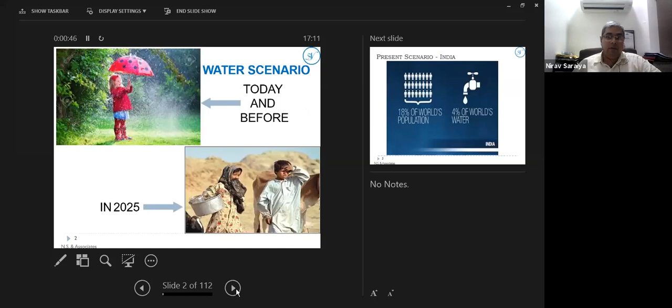Present scenario in India or of the world: only 18% of the world's population is getting 4% of world's water. Nearly half of the world will be short of water by 2025.

54% of India is currently facing high to extremely high water stress. You can see in different parts of India how much water stress is there. Every part of India is facing water problems at some time or another.

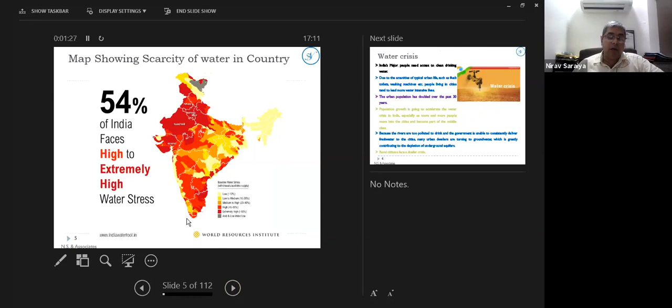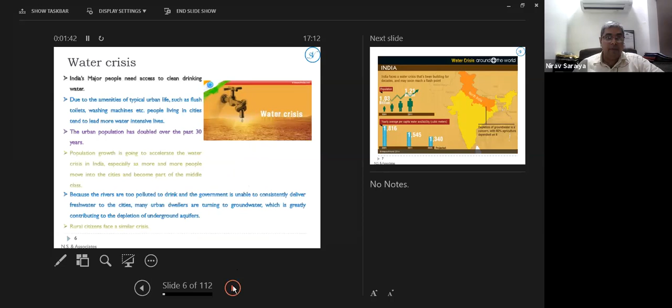Water crisis has become an important part of our life. But how can we reduce it? How can we improve it? We can do it by doing rainwater harvesting.

Earlier, the availability of water in the year 2000 was almost 1800 cubic meters per person per year. Now it has gone down to 1300 cubic meters per year. So water availability has gone down year by year, and as the population increases and due to climatic change, the availability of water will keep on reducing.

Rainwater harvesting is the only solution for reducing the water crisis and eliminating water deficiency. Rainwater is the purest form of water. You can even drink that water if it is properly caught, properly stored, and reutilized after proper treatment. It's the only ultimate source of fresh water.

In this world, 97% of water is in the sea. It's saline water that cannot be utilized. Out of the remaining 3% of good quality water, 2% is groundwater and only 1% is in lakes and rivers. So to meet our water demands in a tremendous way, rainwater harvesting helps us overcome water scarcity, and rain becomes the only and ultimate source that feeds all our sources.

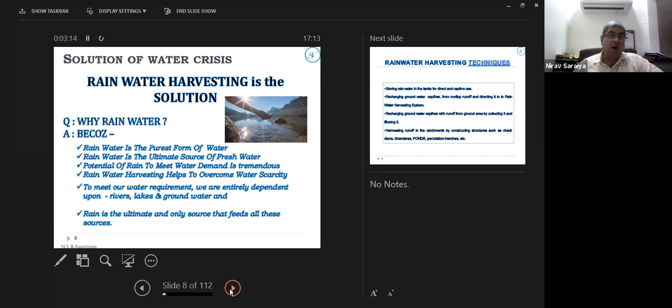What are the different techniques of rainwater harvesting? There are two basic techniques. One is rooftop rainwater harvesting, where that water can be collected into tanks and reutilized during monsoon season or during non-monsoon season for drinking purposes only.

It is not practical to collect the water and store it for the whole year for all purposes. For that, the tank capacity has to be very huge, which becomes non-economical, and hence storage of water for a long time in tanks is ineffective.

The second, very good and best methodology is recharging groundwater through borewells or wells. The water in the ground gets accumulated in aquifers, a natural storage area. The technical word is aquifers, so we need to store that water in these aquifers.

The only issue is that there are no boundaries to these aquifers. The aquifers are spread across a few square kilometers, and for an individual building, there cannot be any boundaries below the earth's strata. Hence, whatever recharging happens becomes a community project and is helpful to everybody.

It's not that only the particular plot holder or society which does the recharging will benefit from it. Surrounding areas, other borewells or wells nearby, will also be beneficial. So it becomes a community project.

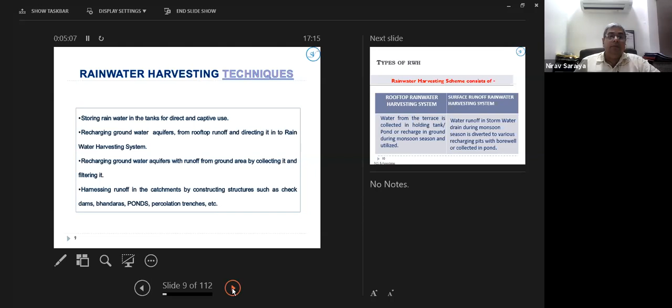As I told you, there is rooftop rainwater harvesting and surface rainwater harvesting. The terrace water, whatever falls on the building, can be collected in a holding tank or recharged into the ground through a borewell or well. Or if you have additional plot area capacity, you can collect it in a pond and reutilize that water later.

Surface water, compound area water, can be recharged into the ground, or if storage space is there, you can collect it into a pond.

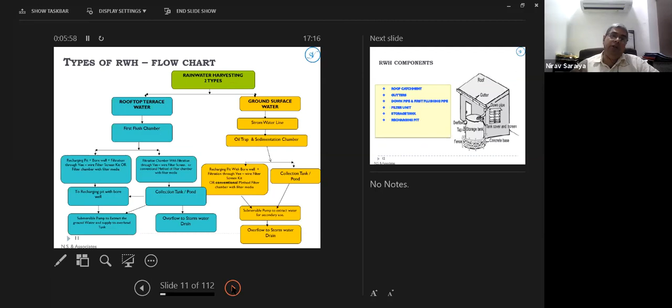Now, what are the components of rooftop rainwater harvesting? In a normal building or a bungalow, there are rainwater downtake pipes, also called rainwater gutters. You require a pipeline to take underground connectivity of all rainwater downtakes to the nearest tank or a borewell.

Then a storage unit, either a recharging pit or a storage unit. But before collection or recharging of water, you need to filter it. Otherwise it will choke your recharging pit, or the storage tank will get silt, and it will choke the pumps.

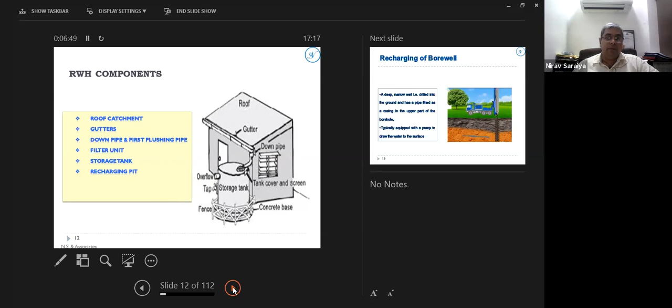Now, how does recharging happen? A borewell is a small hole in the earth strata. Many people still don't know what a borewell is. It's drilled up to 200, 300, 400 feet, reaching the deeper location in the earth strata where water is available. Through that location we install a pump and extract water. Through that same borewell we can inject water, and that process is called percolation or recharging.

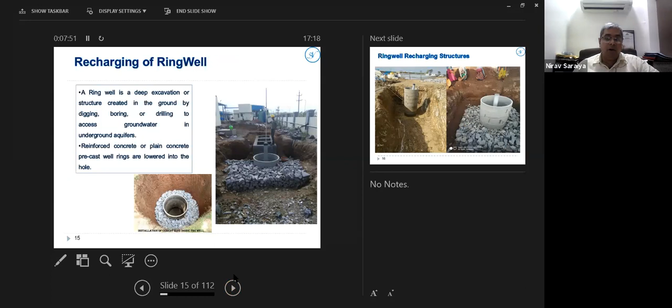This is how the borewell gets drilled in different aquifers or geological formations. This is a typical recharging pit with a ring well and a borewell, and these three units you see are filtration chambers. This is a typical ring well for recharging purposes. These are different photographs of recharging pits and ring wells.

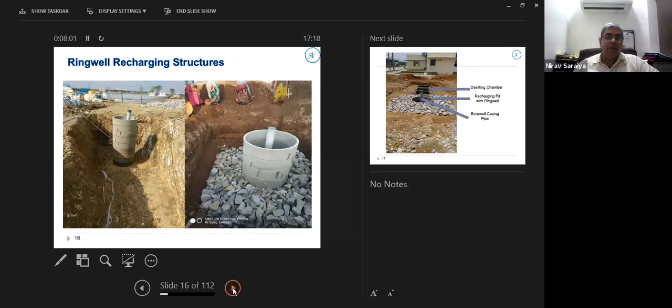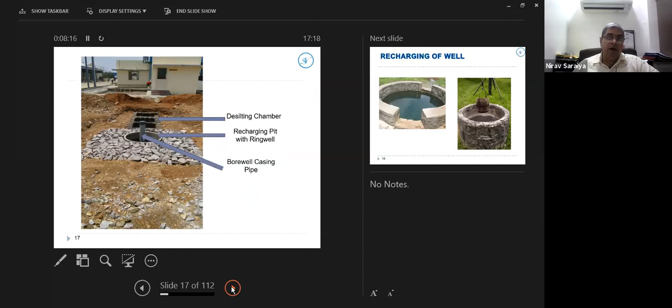This is how the recharging pit looks once you come to ground level. On top of it you can put PCC or do concretization, allowing parking of vehicles, movement of people, and even fire engines or firefighting vehicles to pass over it. This is recharging of a well.

Now, what are the basic requirements for recharging? What data do you require? You require the layout plan, and a groundwater prospect map, which is usually available with a vendor. In Maharashtra it is not provided by the government, so it's not available, but in many parts of India it is. You also need meteorological data—annual rainfall data, how much rainfall falls in a particular area like Bombay, total number of rainy days, and how much of that water you can recharge into the ground. That can be determined once you get this data, along with the recharging capacity of the borewell.

If there is a larger plot, you conduct a hydrogeological survey and study the aquifers. But if the whole plot is concretized or paved with blocks, you can still evaluate the availability of water and the possibility of recharging through a conventional methodology.

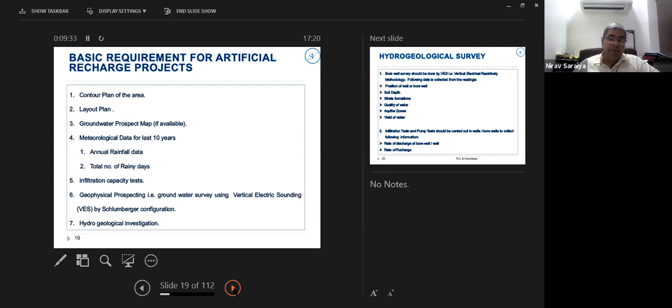This is a technical matter. I will be skipping this method.

Now, these are the typical designs followed in India, and this has failed drastically in urban areas. This is a typical ring well with a borewell in between, and these are the different layers of filter media. I am stressing on this because in most societies in Mumbai, Pune, and different parts of Maharashtra, these typical designs are followed. After spending money, society members or bungalow owners feel they have done rainwater harvesting, but this is most ineffective, and the money gets wasted implementing such systems.

This is a borewell in between, with sand, gravel, and stones. This gets choked very fast. Once it chokes, the water level rises in the ring well. The slots or holes in the casing pipe are above the filtration media level, and through these perforations, unfiltered water goes into the borewell, causing it to get contaminated and choked—it would not absorb water or even give out water.

The water will become stagnant in this recharging pit and start stinking. People feel they have spent money and that rainwater harvesting and recharging is happening, but in this scenario it is practically not happening, and all the money has gone down the drain.

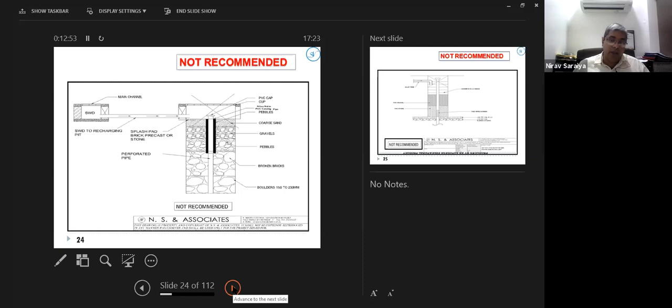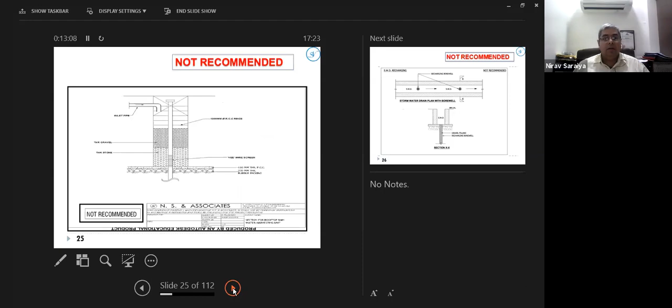This is another not recommended model. Now this is another typical thing I am seeing, another typical thing I am seeing.

Just hold on, just hold on. Hello.

Every type of system you implement, maintenance is the important part. It's an important factor. If you don't keep cleaning the filter media - sand, gravel, stones - every 7 days during the monsoon, the system is going to fail. There are new types of filters available in this industry where minimum or zero maintenance is required. But what we have observed in societies is that costing and the lowest price becomes the only importance. In this scenario, the main purpose of technical competency is lost.

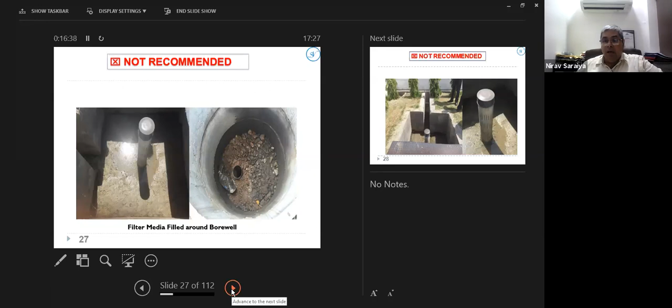These are typical photographs of societies where rainwater harvesting structures were made without any technical guidance, and the systems are choked. Due to water stagnation, lots of insects keep coming, and slots are cut here right up to the top, so unfiltered water goes into the ground and the borewell gets choked. Here inside the ring well, the borewell is just cut above the filter media, and you can see what type of particles are inside - everything has gone into the borewell. This really disturbs the aquifers and the groundwater table.

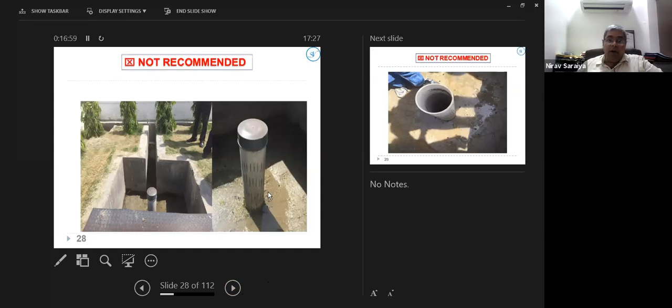This is the direct connectivity from the storm water drain into the recharging pit, and in this photograph you can see the slots above the filtration media - as the water table increases, unfiltered water goes inside. In the next photograph you can see all the dust particles have gone inside.

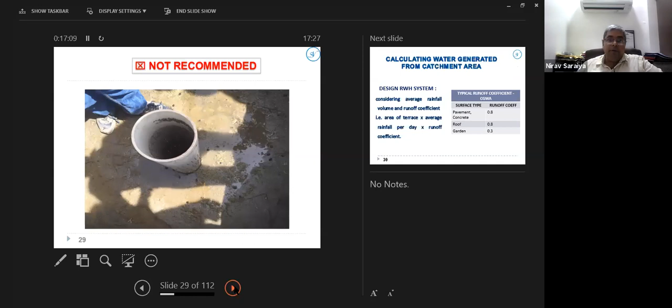These are the various calculations for rainwater harvesting. I would not go into that much technicality right now. I would be more focused on talking about case studies and how rainwater harvesting in societies should be done.

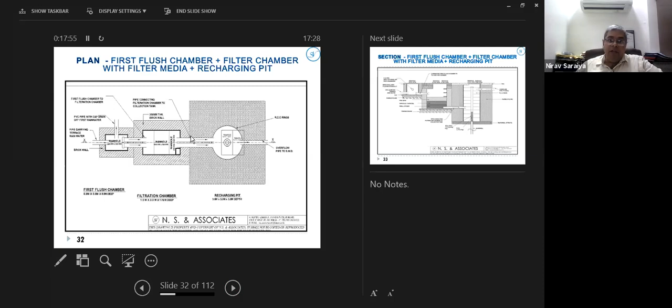This is the typical correct design of rainwater harvesting. First is the first flush chamber - whatever first rainfall comes, a few showers of water should be diverted into the storm water drain because it contains lots of silt, contaminants and pollutants, so that water should not enter the recharging pit. Then you have the filtration chamber with filter media. Here I have seen the filtration chamber placed outside the recharging pit, which reduces contaminants getting accumulated around the borewell and thus does not disturb the subsoil or water level.

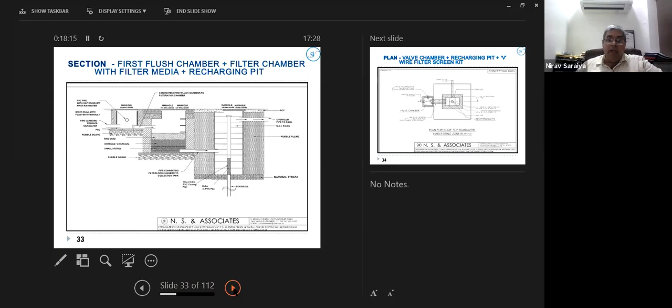Now, what's the difference between the conventional rainwater harvesting structure and our structure? In the conventional design I showed you earlier, which is not recommended, the recharging ring well size is only 1.2 meter diameter. The rainfall coming in is say 10,000 liters of water per day, but borewell recharging capacity is only 500 liters per hour, so you need to store 10,000 liters of water around the borewell in the recharging pit. The ring well is only 3 meters deep and it can collect 3,000 liters of water.

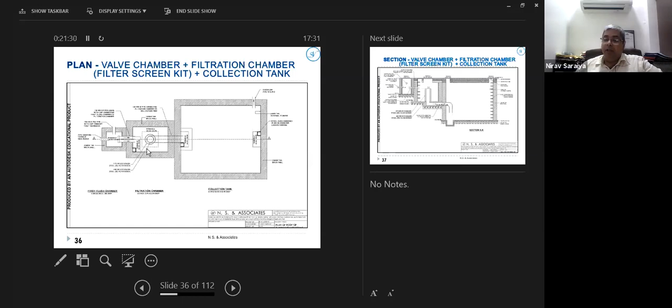Now this is a structure: valve chamber, first flush chamber, filtration chamber with filter screen. These filter screens are called V-wire filter screens. They are non-choking, non-clogging filters, and require only once a year cleaning. That's all, you need not monitor the system. The water gets filtered and keeps on percolating or collecting into the water tank.

Here we have shown this water tank. During the monsoon, you collect this water into the tank and you can utilize it for flushing purposes, and if there is a real water shortage, you treat this water and utilize it for drinking purposes also. In non-monsoon season, you can even utilize this borewell water or the stored water for your gardening purpose.

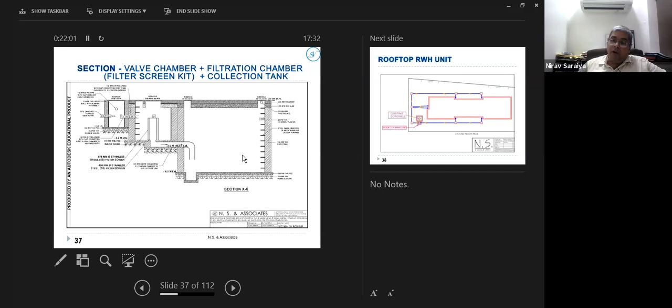They go inside somehow, they do that jugaad and go inside, but they are not able to bring all the filter media to the top, wash it, clean it, and put it back inside. Due to problems going inside and coming out of the recharging structure, the maintenance is not happening properly because a proper ladder is not there for that structure.

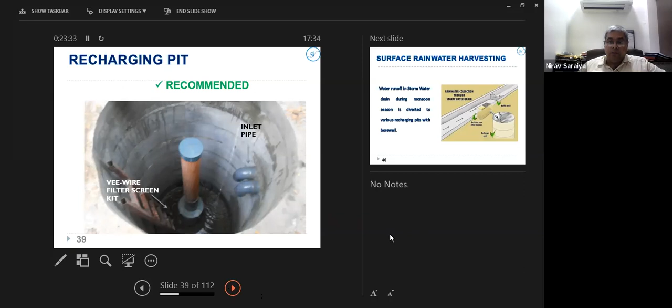This is a surface rainwater harvesting system. This is a storm water drain. From the storm water drain, the water has to pass through the desilting chamber, filtration chamber, and then passed into the recharge structure of the borewell or well.

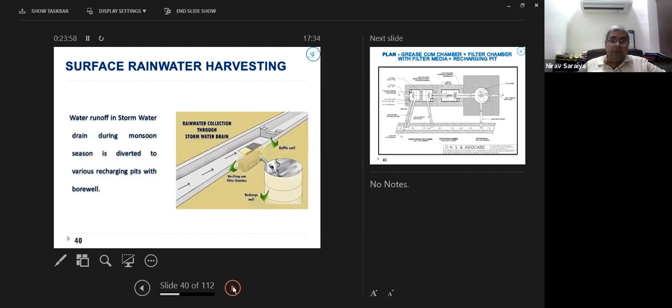This is a typical design of a surface recharge structure: desilting chamber with oil trap, grease trap, sedimentation trap, filtration chamber, and then the recharging pit.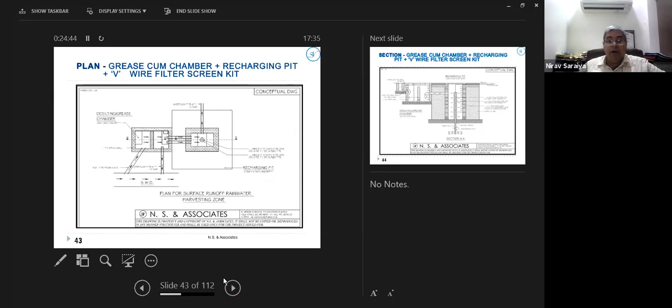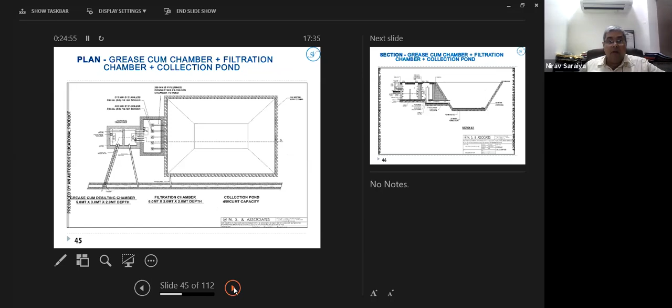This is a typical cross section. Now I will move quickly over to the case studies.

Now this is a speciality of the V-wire filter screen kit. Why am I explaining this? Because it has got a code from BIS, the Bureau of Indian Standard. Whatever other filters are available in this industry, they claim they have a patent or that it's on a technical background, but there is no such technical background.

These are all self-made, self-proclaimed, self-marketed filters. But there is no technology behind such filters. So please be aware that you don't choose the wrong filters.

Second thing, this is made of SS304 and they are non-clogging and non-choking filters, due to which continuous flow of water happens and it keeps on recharging or keeps on collecting water into the tank.

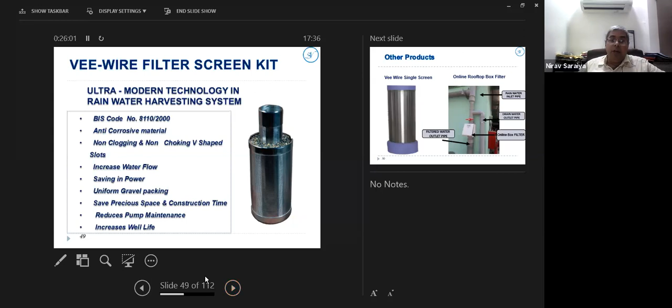This is a filter which can be installed on rainwater downtake pipes. If you have limited 2 or 3 rainwater downtake pipes, such filters can be installed.

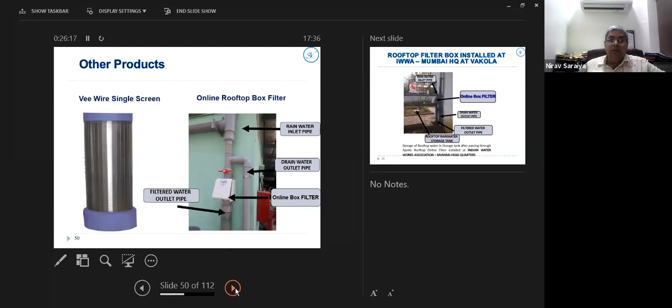This is a famous case study from Bombay. It is the Indian Waterworks Association Mumbai headquarters building, where rooftop rainwater downtake pipes collect water into a tank here.

And the water from the rooftop is collected into this tank after filtration through this box filter.

During the monsoon season, this office building uses this water only for flushing purposes, and they are daily saving around 5,000 liters of water.

This is a comparison between a conventional rainwater harvesting filter media and the filter kit. In filter media, the filtration happens vertically, so the filter media gets choked very fast.

Here, the filtration happens horizontally, so the heavy particle sediments keep settling at the bottom. Floating particles keep floating on top, and horizontally the water gets filtered in between and keeps on percolating or keeps on collecting into the tank.

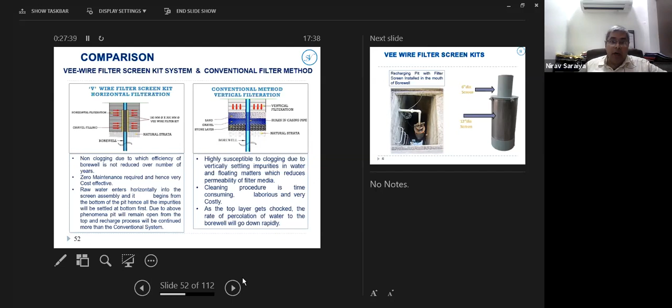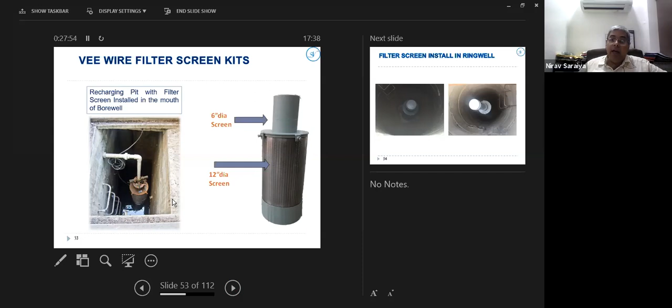This is a typical photograph of a recharging structure with a ladder, with a filter screen kit, and from the same borewell, water is extracted and utilized for flushing and gardening purposes throughout the year.

These are different photographs of a ring well with a recharging pit, with a filtration kit installed inside the borewell.

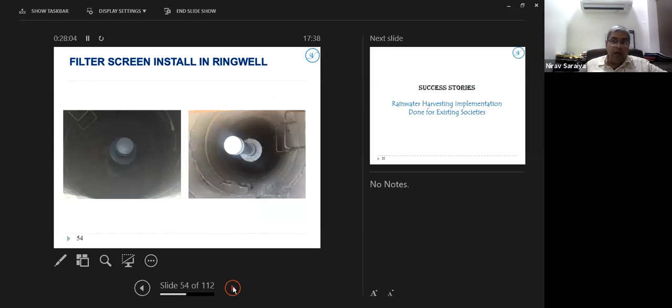These are now the successful case studies of rainwater harvesting done at various societies in Mumbai and at different parts of India also.

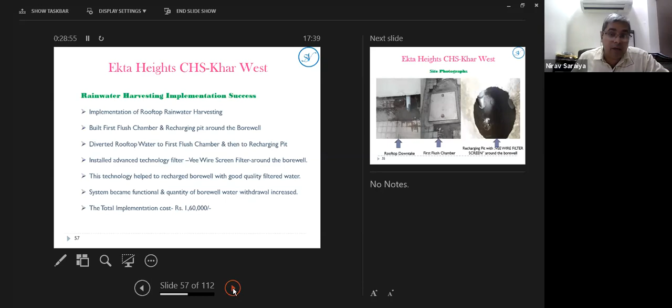It was implemented in an existing society and it is functional for at least the last 3 years.

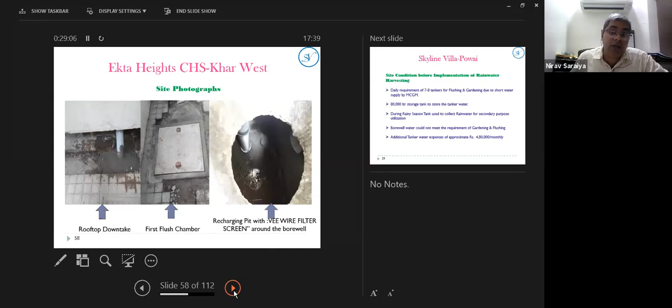This is the Skyline Villa project in Powai, where the society is owned by all IITians, mainly IIT professors. Their daily flushing water requirement was met through 7-8 tankers, and there was a continuous shortage of water from MCGM.

So they had constructed an 80,000-liter storage tank for tanker water, which they used to collect during the rainy season. Then we suggested a rainwater harvesting scheme.

So during the monsoon season, we started collecting the rooftop water into that storage tank, and the tanker cost of around 7-8 tankers per day was saved.

At least 4 months of the monsoon season, they were not getting any tankers and were self-dependent. Their tanker cost was almost 4 to 5 lakh rupees per month.

By doing a simple rainwater harvesting system, they started saving almost 12 lakh rupees annually per monsoon season.

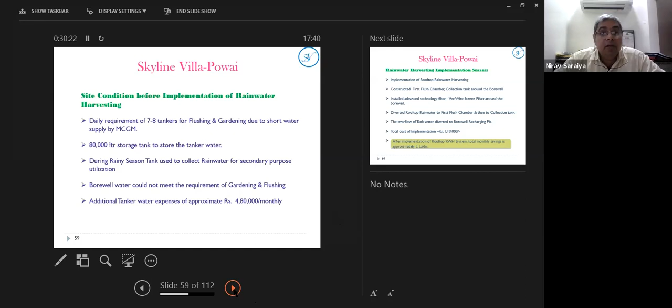Then we did another factor for them. Surface water and compound water was recharged into the ground through borewells.

And now during non-monsoon time, they have started getting water from the borewells through those recharging pits, and hence they have even started saving on their tanker water cost.

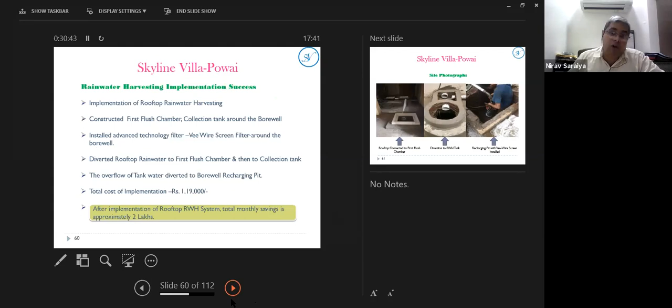Every day they are getting 2 to 3 tankers of water from their borewells, saving the tanker water cost. These are some photographs taken for connecting rooftop rainwater downtake pipes to this collection tank, and this is the recharging pit.

This is one of the towers of Mahindra Gardens at Goregaon, a huge society of more than 300 flats. All the surface water and roof water was flowing out of the property. They had an existing borewell, but the water level inside that borewell was going down every year, so the society decided to recharge that borewell and sustain that water for a longer time.

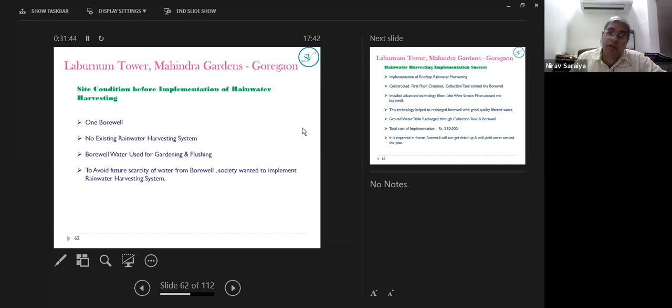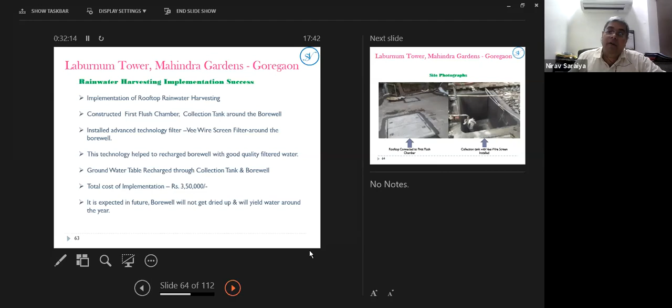During summer season they were facing water problems, and the availability of the borewell was going down and down. We have done rainwater harvesting structures there, and now the water availability in summer season is not reduced. Post monsoon, we observed that the groundwater level has come up and the quality of water has improved drastically. Total implementation cost was only 3.5 lakh rupees, but with proper technical implementation, they have saved their borewell from going dry. This water will be available for them for at least 10 years or more. These are the actual photographs of implementation of rainwater harvesting at the site.

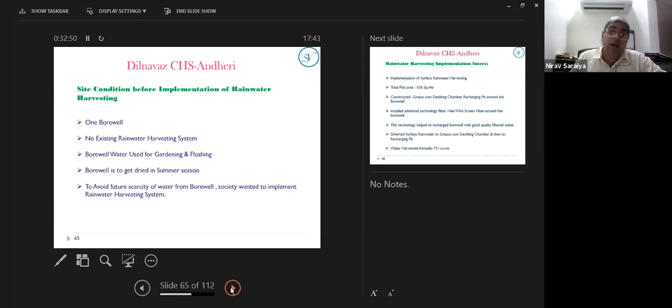This is Dilnavaz society in Andheri. Again, one borewell, no existing rainwater harvesting system. Borewell water was used for gardening and flushing purposes, and the borewell used to get dried up in summer season. After only one monsoon of recharging, now the borewell does not get dried up, and even in summer season they are getting water for their flushing purpose. So in short, rainwater harvesting helps improve your groundwater table, and the availability and quantity of water improves, and the quality of water improves. That's the importance of rainwater harvesting.

Just last year we had some heavy water issues due to a water pipeline getting damaged somewhere near Andheri and Goregaon, and particular areas like Bandra to Jogeshwari east and west were not getting water.

The societies where we had done rainwater harvesting, or where it was properly done, were on the very safe side. At least they were getting basic water for drinking, cooking, and domestic purposes. For 3-4 days you can utilize this borewell directly for domestic purpose, but not for a longer time. But in case of emergency, at least this water was available. Even water tankers were not available, and there was a heavy shortage of water.

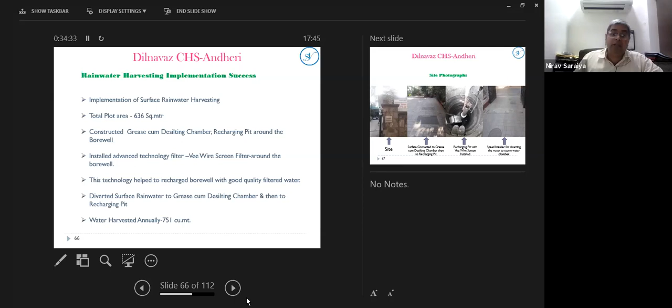Even drinking water bottles had disappeared from market shelves - there was a big shortage of drinking water during that time. Only rainwater harvesting systems saved people in Mumbai during that period. That's the importance of rainwater harvesting, recharging, and collection of water. Across all these societies, we have harvested anything between 20 lakh liters to almost a crore liters of water in one monsoon season. So this much quantity of water can be collected and conserved. This is the best conservation methodology, through which you get long term results - results will not be seen in the short term but in the long term.

These are actual photographs from a society showing how the finishing happens on top, and how vehicular parking or other movement can happen on the paved area in the compound. This is a photograph inside the recharge structure - this is the shaft, or collection trench, from where the surface water flows out of the property. Here in this shaft the water gets accumulated and is then diverted into this recharge pit.

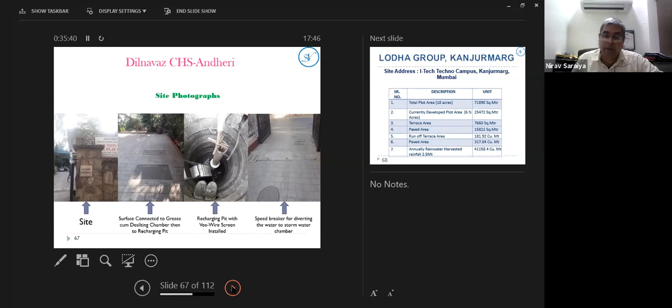This is another big case study. Now, moving from societies, I am coming to some commercial projects - later there are some more society projects. This is a huge project of 18 acres at the Kanjurmarg site. Lodha Group has made an 18-acre site where it's an IT park.

Per day we are collecting water from this huge terrace area - 80,000 square foot of terrace area collects 1,40,000 liters of water per day. That water collected is utilized for running the water-cool chillers, AC systems, and the flushing system of the project. During monsoon season, the numerous borewells in the plot area are recharged, and during non-monsoon time these borewells provide water for flushing and for water-cool chillers for AC systems, so they don't have to buy any tankers from outside.

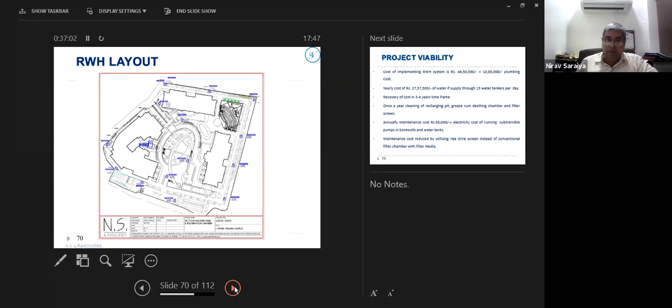This has helped them save 25 lakh rupees every year - actually every year they are saving 27 lakh rupees, and the total implementation cost was 56 lakhs, which is very negligible compared to what they are getting every year.

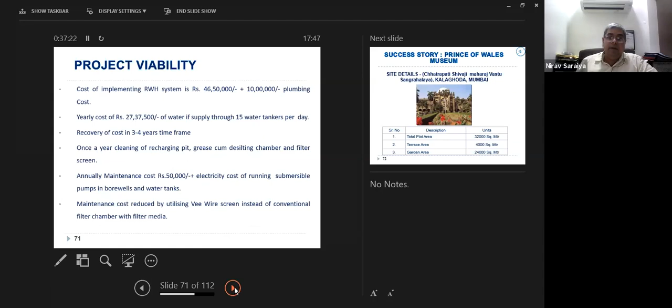This is another successful case study called Prince of Wales Museum. Everybody would have heard of it, it's near opposite Regal Cinema, near Gateway of India. This is a heritage building, and they had a borewell here drilled in 1965, only 40 feet depth. They were getting good quality water, once upon a time almost 15 to 20,000 liters per day.

After years of usage, the availability of water in 2007-2008 had reduced to 10,000 liters per day. After doing rainwater harvesting, rooftop rainwater harvesting, today we are getting almost 20,000 plus liters of water per day.

There is no water shortage for maintaining the gardening or for flushing purposes. Every year in the peak summer season, their peak season with maximum visitors, they had a heavy shortfall of water for flushing from the MCGM. Now by doing rainwater harvesting and recharging, they are getting water even in the flushing systems during summer. There is no shortage of water and their greenery is properly maintained round the year. That's the benefit they get out of rainwater harvesting.

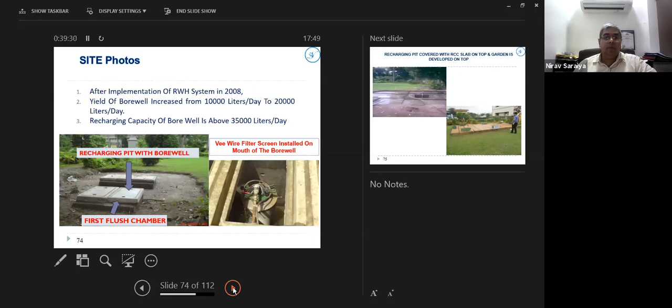This is how, inside the garden, the recharging structure is made, and then the garden goes back to normal. So you cannot understand that there is a structure constructed below your garden area.

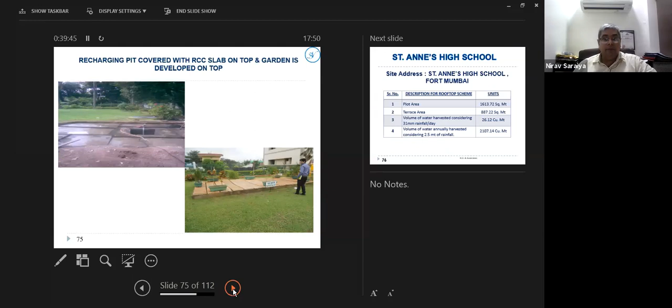This is another case study again of the same area, Colaba, near Regal Cinema. This is a famous heritage building, St. Anne's High School. Here they had an issue, there was a mandatory requirement also, and they had water problems too. We did rainwater harvesting for them, and even during peak rainfall of 500 mm per day, there is no flooding in the compound area of this school.

Now they have started getting water round the year for their flushing purpose, for cleaning their campus area, and for cleaning building lobby areas. Continuous water supply is available round the year, with no reduction in water availability during the summer season.

This is a photograph where the school is located. This is a typical photograph of the recharge structure.

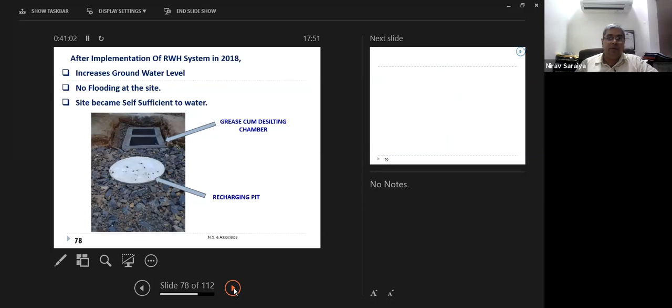This is another successful case study called Inorbit Mall. It is at Vadodara, made in Alembic area. They had a typical problem - this is a location where flooding used to happen.

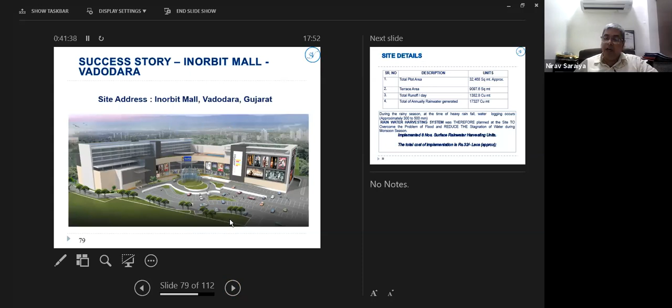During that flooding, the mall used to get affected. We did 8 numbers of huge size recharging pits - 4 meter by 4 meter, almost 12 feet by 12 feet and 12 feet deep, with a borewell of almost 200 feet depth. All this flooding water was transferred into these recharging pits, which helped eliminate the flooding problem.

It was all constructed in different locations in the parking areas. Parking was back to normal. Flooding got eliminated, their borewell water quality improved, and the quantity of water availability improved. So many benefits you get out of rainwater harvesting, and the total implementation cost was only 32 lakhs.

Due to elimination of flooding, the mall used to get closed for a few days previously. Now the mall is not closed for a single day. So there was significant financial loss earlier, and by implementing a systematic system, they have removed their financial losses.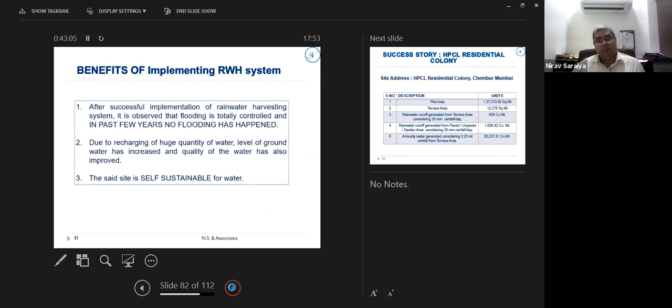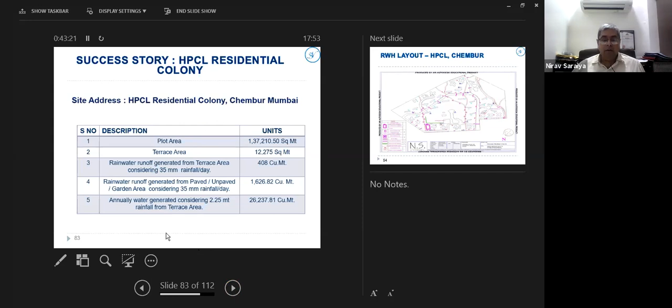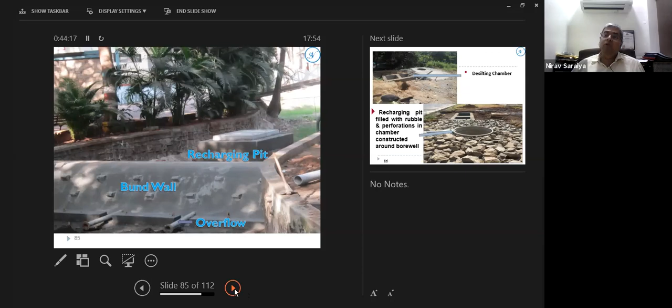In the surrounding areas, what we observed inside the colony as well as outside, the borewell used to get dried up during the summer season and it affected their greenery and flushing systems heavily. They were not having a separate water availability for flushing purpose.

They were utilizing only BMC water for flushing purpose. After they started getting so much quantity of water through borewells and rainwater harvesting bund wall, they started utilizing this water for flushing and gardening purpose. Every year they are saving almost 80 lakh liters of water. Just imagine, 80 lakh liters of water getting saved annually.

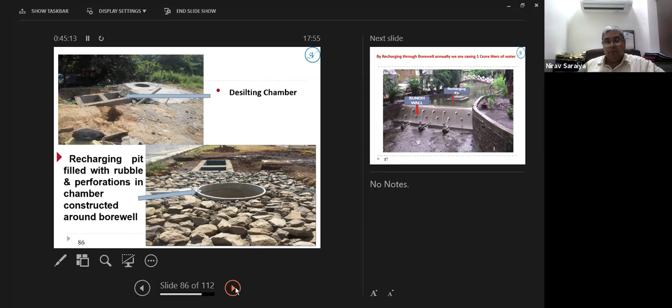These are the typical photographs of the recharge structures constructed at the site. This is the photograph in the monsoon season taken for the bund wall. This is a recharging structure. This is a borewell inside it, and this borewell has helped to recharge so much quantity of water in the surrounding area outside the property as well as inside the property.

Nowadays not a single borewell gets dried up in summer season. Every borewell gives water and that water is helpful for flushing purpose or for gardening purpose. So this is one of the very big successful case studies.

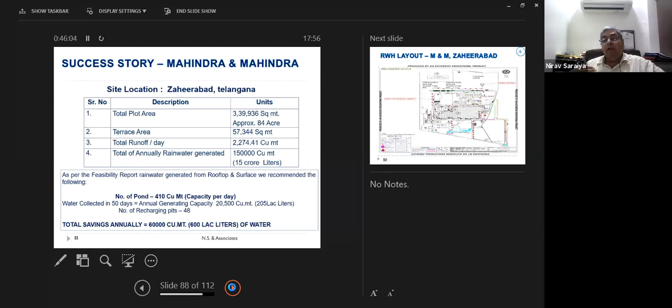This is another factory project where the surface water was just flowing out of the property. It is around 84 acres of property and the backside water was just flowing out of the property. So we collected that water into this pond. They had an everyday requirement of 4 lakh liters of water and they were totally dependent only on borewells round the year.

So what we suggested is that surface water is just flowing out of the property. We collected it into a pond and reutilized it for at least 50 rainy days of monsoon. This is near Hyderabad, near Zaheerabad, where rainfall is almost 1000 mm annually and that water was just flowing out of the property. What we suggested and they implemented, for 50 days they are collecting water into this pond and not touching their borewells.

Their borewells were getting increased water in the summer season due to non-touching of aquifers during the monsoon season. The availability of water increased in the summer season. So this is how you do the permutation combination, that is water management techniques, to save and conserve water.

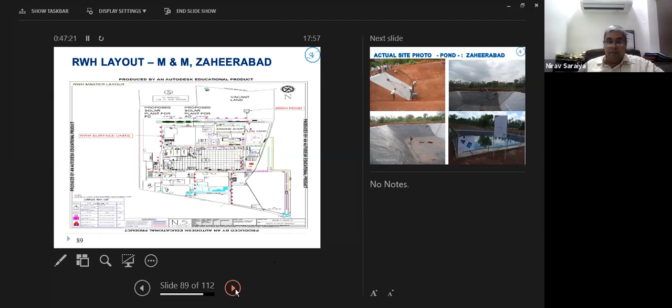Now the water quality is so good that in chemical treatment of that water, the chemical consumption reduced by almost 25%. First thing, the quality improved. Second thing, free of cost water availability. So this was the benefit to Godrej Industries.

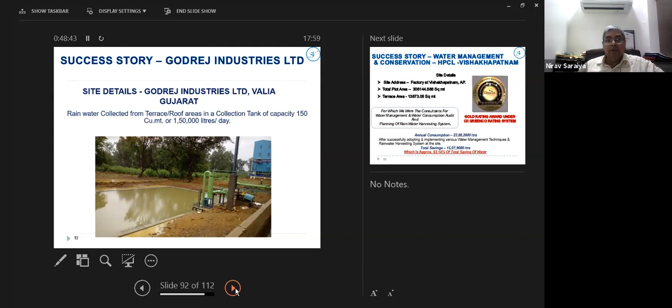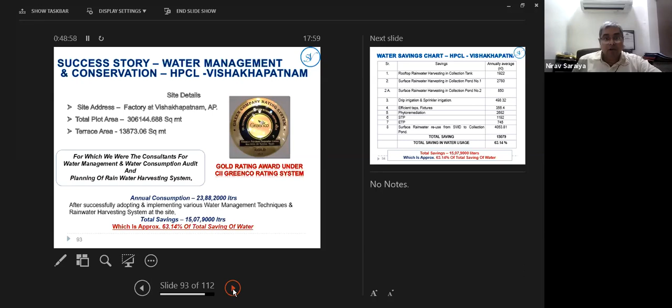These are some famous case studies of water conservation and water management. This is a factory in Vishakhapatnam for Hindustan Petroleum, where we implemented different water conservation techniques. We collected rainwater into a tank, into a pond, then we implemented a drip irrigation system, then we changed the taps of the whole building.

We recommended implementing low flow water fixtures, then a water recycling system. Now lots of people are going for water recycling systems, but there are non-mechanized water treatment systems where only electrical cost is there, no chemical requirement or manpower requirement to run that plant. So we suggested that type of plant, recycle the water, treat the water, and reutilize it for plant processes as well as for flushing purposes.

So by using different techniques of water conservation, you can save a huge quantity of water. That's all, those are the cases.

We are specialized in rainwater harvesting and water management services, and we provide our services all across India. We have done projects at almost 60 locations in India, and sitting right now in lockdown also, we are providing our services, but the projects are going on in north, south, east, west. Right now projects are going on for Mahindra factory at Haridwar, Ghaziabad, Sitarganj, Vishakhapatnam, Hyderabad and Bombay.

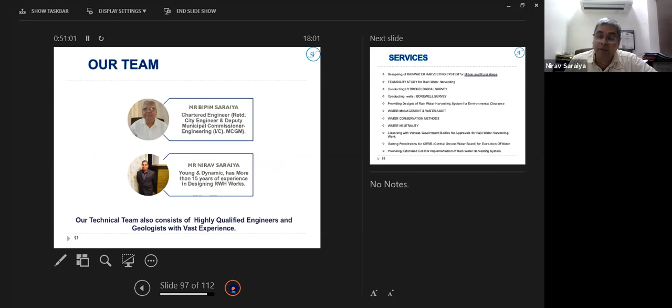The projects are going on. We have our technical teams, and this is my partner and my father, Mr. Bipin Saraiya. He is a retired Deputy Municipal Commissioner, Bombay Municipal Corporation. And we have a team of professional engineers and geologists to do rainwater harvesting designing.

We do rainwater harvesting feasibility study, estimations, borewell surveys, water management, water audits, water conservation reports, water saving schemes, getting borewell permissions from various authorities. Lots of such work related to rainwater harvesting, borewells, and conservation, we keep on doing for different locations.

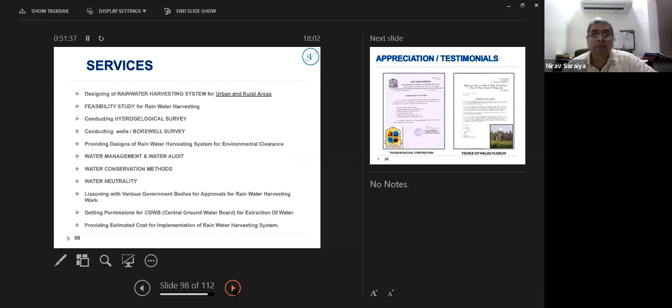These are some of the appreciation letters we have gotten from Thane Municipal Corporation, Prince of Wales Museum, Navi Mumbai Municipal Corporation. I give trainings at IIT and the Indian Waterworks Association. I am also a lecturer at various engineering colleges. We have done projects with Hindustan Petroleum, Bharat Petroleum, Mukesh Ambani's Antilia, and Mantralaya. We have been involved in various iconic structures across India.

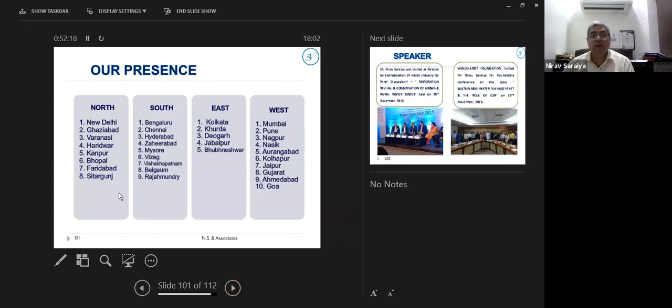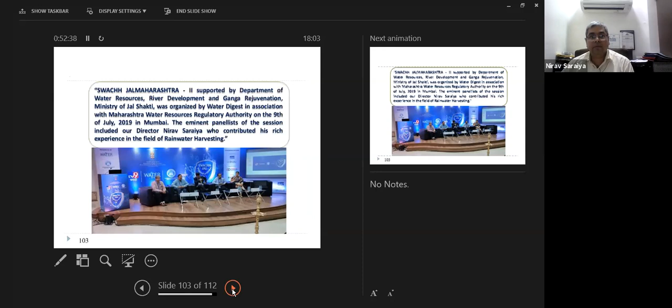These are some of the locations where we have a presence across India, and these are photographs of me as a speaker at various panels and occasions. I am a speaker on behalf of the government, and I am a National Technical Committee member for IGBC. On behalf of CII, I keep delivering lectures across India.